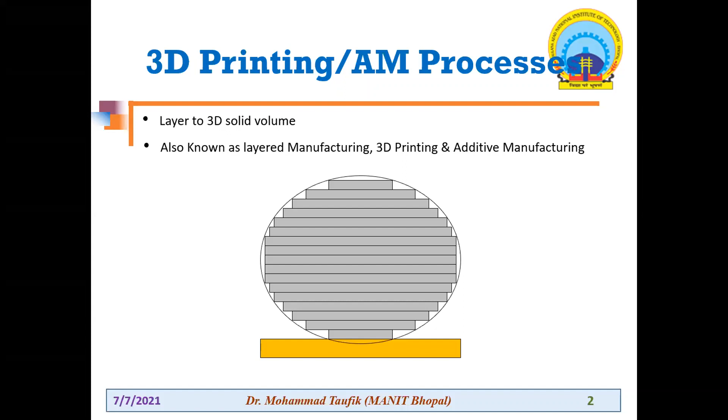Different names are used for it, however it started with the name rapid prototyping in the late 80s. From prototype development, nowadays it is creating actual parts that we are utilizing in direct part applications. That is the big advancement from additive manufacturing. We are now utilizing this process in direct part fabrication, meaning we can generate production grade parts. That's why it is known as additive manufacturing. Earlier we were utilizing it only for prototyping, not for industrial grade products that could be directly used. So it was termed layer manufacturing or 3D printing.

Now, why is this particular technique so important in the current scenario? Consider different situations, like the disaster management we face nowadays due to COVID-19. We all know this virus has affected the whole world. So people are coming up with very good ideas. Whenever we talk about 3D printing, anyone can think of something and quickly relate that idea into reality. Anyone can come up with different types of ideas.

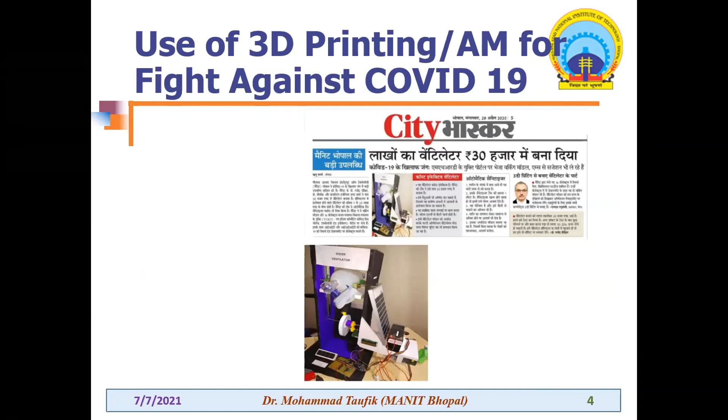Here at MANIT also, we have developed, with the help of 3D printers, some low cost ventilators. We have printed plenty of parts of this particular ventilator through 3D printing. Apart from this, I have also completed two projects here. One project is related to the development of 3D printed arm or elbow operated water tap handles. As we know, water tap handles are very prone to infection, since people use them in common washrooms, and there are more chances of infection there. So what we can do is try to minimize this spreading, and we tried to understand this through the project.

So I have added some video for you to show this.

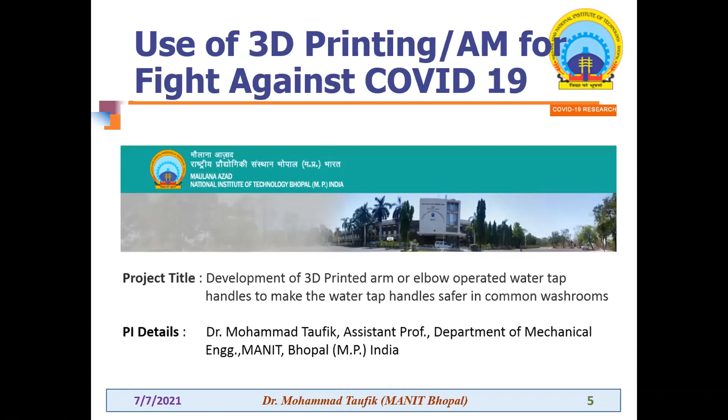This particular video is also going to cover how we are going to utilize the 3D printing process. So now, whenever we are talking about the additive manufacturing process, it starts with the CAD model. So we need to first draw a CAD model, some idea we have, and then we are going to convert it into the CAD modeling.

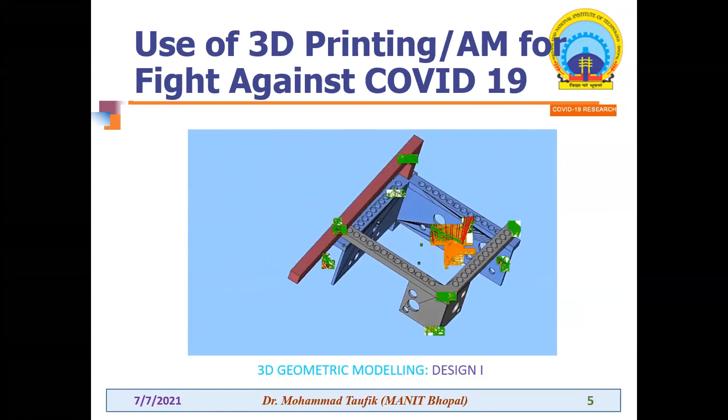So this is design one. In this project, we have developed 2 different designs that can easily set on the water tap. This is design number 2. So first of all, in the 3D printing process, it starts with the CAD model, and we need to convert this CAD model.

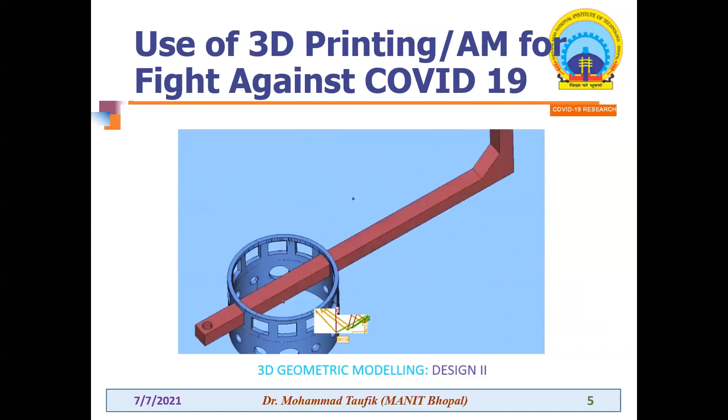And then this data we need to send after some pre-processing to the machine. So this is one of the small entry-level additive manufacturing machines, for example, 3D printers we have here. Whatever design we have, we can quickly go and print it. This is layer by layer part fabrication, and once we print it, we can see these are the 2 models.

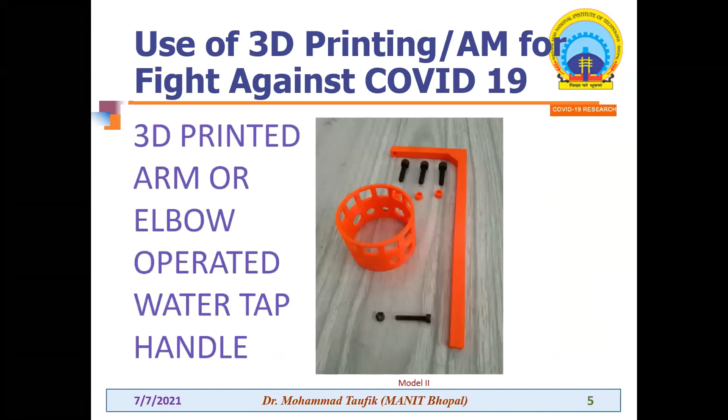Just as we have seen the CAD model, we can install this particular thing on the water tap. So instead of opening through the hand, now we can open it through the arm. We have installed it here in MANIT also. You can open with the arm instead of hand, and at the same time we can also operate this particular thing with the elbow. So we can somehow prevent direct contact.

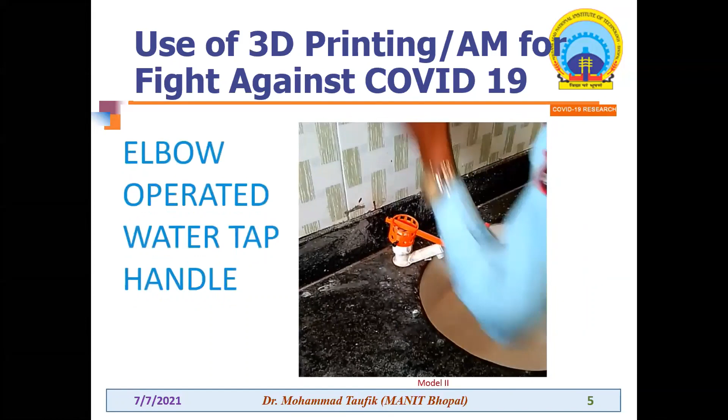So this type of innovative idea you can come up with using additive manufacturing. Whatever you are going to think, you can quickly convert into reality. This is the main benefit of this particular technology, unlike the conventional manufacturing process where we are dependent on different people. For example, if you are going for casting, we need to create the mold.

Through the pattern, we need to create some pattern. Conventionally, we have the wood pattern, and then we need to calculate the different shrinkage allowances. And then, depending on so many people, we need to buy the appropriate tools, and then we can go for this type of casting or sometimes machining process.

But here, in the room itself, it is also known as desktop printing. You can buy a printer, put it on the desktop, and quickly by yourself create any part. So an idea you can create into reality with this particular technology. This is the beauty of this particular 3D printing.

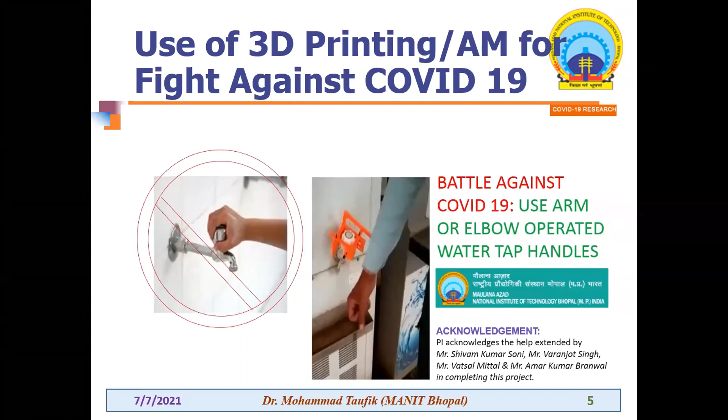That is the reason people are more and more attracted towards this particular technology. Nowadays, in Industry 4.0, we are utilizing this particular additive manufacturing or 3D printing. So you have come across this type of application also, face masks. And this is one of the very early applications of 3D printing in the COVID-19 situation, the ventilator splitter.

In the early days of COVID-19, we've gone through this particular news. So whenever we require more than 2 persons, or multiple persons, through a single ventilator, we can utilize this splitter. So different types of applications we have seen, and this is the reason why people are moving more towards this field in additive manufacturing.

So if we are going to classify this particular additive manufacturing or 3D printing, there are different classifications. Based on that, you can classify it. There are some standard classifications. Here, what I have covered is this particular classification of additive manufacturing based on the material utilized.

For example, if anyone is going to utilize the material in the form of liquid, if we have the input material in the form of liquid, we can classify that whole set of additive manufacturing or 3D printing processes as liquid based. If we have the material in the form of powder in the initial stage, we can classify it as powder based additive manufacturing process. Similarly, the same concept goes for solid based. If we have the material in the form of solid or wire, we can classify it as solid based additive manufacturing process. So this particular additive manufacturing started with stereolithography in the late 80s.

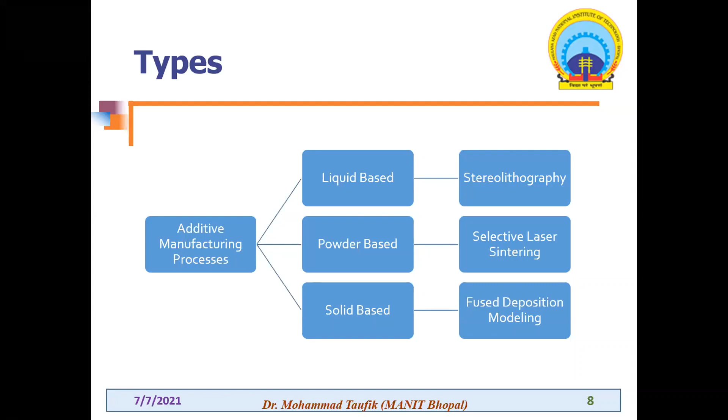Based on this, we are going to classify first, and then try to understand from the basic concept how we can utilize 3D printing or additive manufacturing processes in an optimum way, so that we can utilize it properly. It is not simple printing where you just take any file and print it. There is proper physics behind how we need to print it, which we will discuss in the coming slides.

First is the fused deposition modeling we are going to cover here. Nowadays people are also calling it by this name given by Stratasys, the company situated in America. Since that is a copyright name, people are now calling this technology fused filament fabrication due to some copyright issues.

So we will try to understand what this fused deposition modeling is through some animation. I have added some animation for you people so it will help in understanding.

So anyone please reply whether the voice is coming from this video or not. Yes sir, it's audible. Oh okay, video from video. So you can play it first. No voice is coming from the video. Voice is coming from the video or not? No sir, no. Voice is not coming from the video. Okay, so let me explain it.

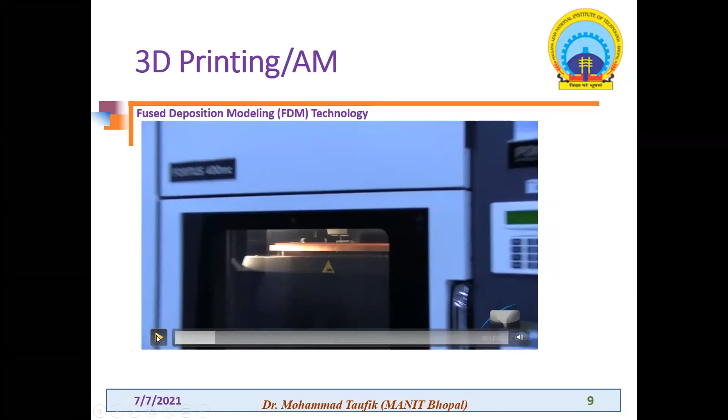So this is the FDM machine. We are utilizing it also for production grade part fabrication. There are different types of machines generated by the Stratasys company.

So here, see the close view. This is the two nozzle we have here from this particular video. You can observe through these two nozzles we are going to extrude the material, depending upon the feature of the material.

For example, if we have any overhang feature, to provide support to this particular overhang feature we need to extrude other material, that is the support material, instead of the model material. So two materials are required: one by which we are going to print it, and one by which we are going to provide support to the overhang features. After fabricating it, we can remove that particular overhang feature from the initial base model. That's why we have the two nozzles here.

See here, layer by layer, in a plane it is going to print the material. See here, in the XY plane or build platform, this is going to generate the part.

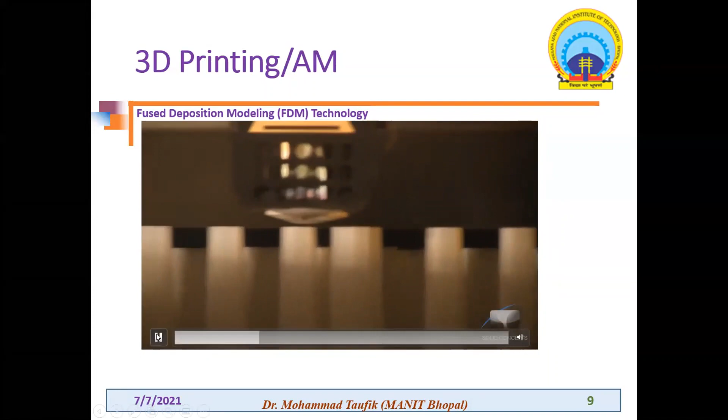Here we need to understand, once we have the CAD model, we need to slice it. Slicing means we need to provide the data in the form of planar, 2D geometry. So whatever 3-dimensional object we have, we need to slice it, and each planar geometrical data we need to pass to the machine one by one.

In each slice, we are going to generate the toolpath for each slice, and that particular thing is going to be read by the machine. Based on that, we are going to print the part. So this is the slice model of the CAD, of that particular CAD model.

We have gone through the previous video where we have seen that particular CAD model. After modeling that thing, we need to go for slicing. For slicing, we have different types of open source and paid software by which we can utilize this slicing concept. Those who are doing research in this field can write their own code through which they can slice it. So there are 3 different alternatives: open source, paid, or you can generate it by yourself.

So first of all, we need to go for the slicing. See here, whatever 3D CAD data we have, we need to slice it and convert it into the layer format.

Once we have that particular data, now we are going to transfer it into the machine. Here we have 2 spools: one is for the model material, another one is for the support material. See here, through this animation, we are trying to understand. This is the nozzle assembly, 2 wire spools with 2 nozzles.

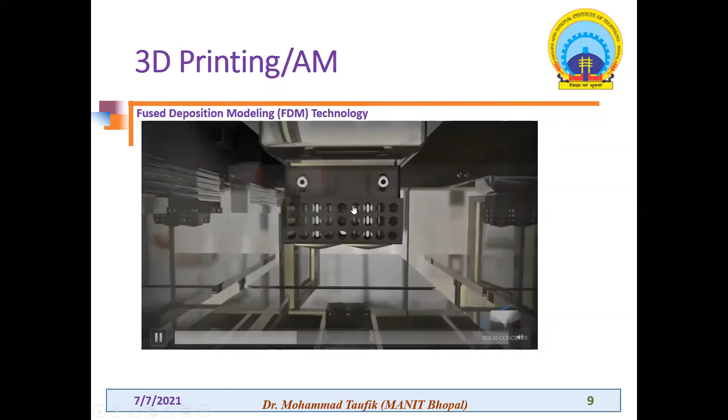See here how this material is going to pass through the nozzle, through some feeding mechanism. We need to provide some feeding mechanism through which it is going to pass to the nozzle. In between the nozzle and the wire spool, we have some sort of feeding mechanism.

And then, through this feeding mechanism, it is going to feed this wire to the nozzle. Here, see the internal view. We have the build material by which we are going to build the part, and the support material by which we provide support to overhang features, otherwise it is going to topple down. Third is the driving wheel through which it is going to pass.

And it is going to pass this particular wire to the nozzle, and in between we have the heater, liquefiers, that is going to heat that particular wire material. After heating, it is converting into semi-solid form, which is going to extrude through the nozzle.

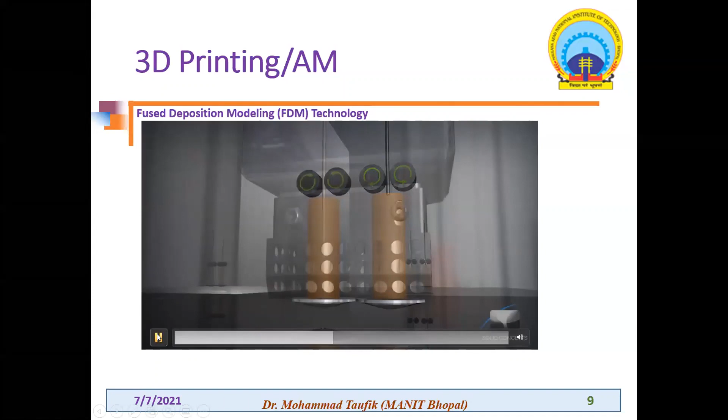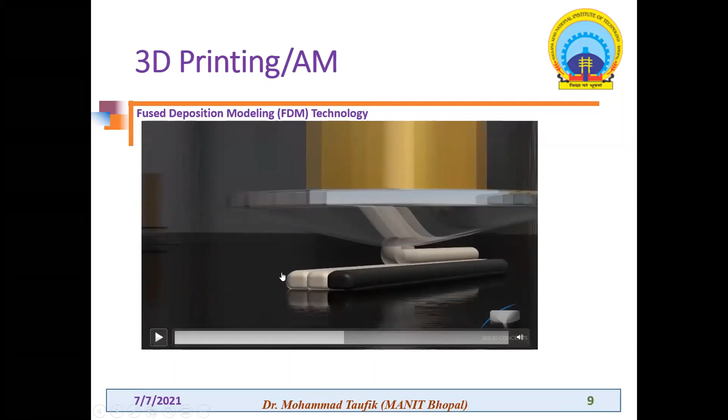Once it is going to precisely extrude that particular material from the nozzle, it is going to build the part. Let us see this animation. Assume this black one is the model material, and the white one is the support material. Based on the feature, it is going to extrude sometimes both materials, or sometimes only one. If vertical feature only, it is going to extrude only black. If we have some sort of inclined feature, both are going to be extruded. So it depends.

If you look at the whole geometry of this particular slice data, this black one represents the actual material. Here we have the extruder, extruding nozzle, and it is going to build the part layer by layer. These different color planes represent the slice data along that particular plane, and one by one, each slice data is going to pass, building the part in that manner.

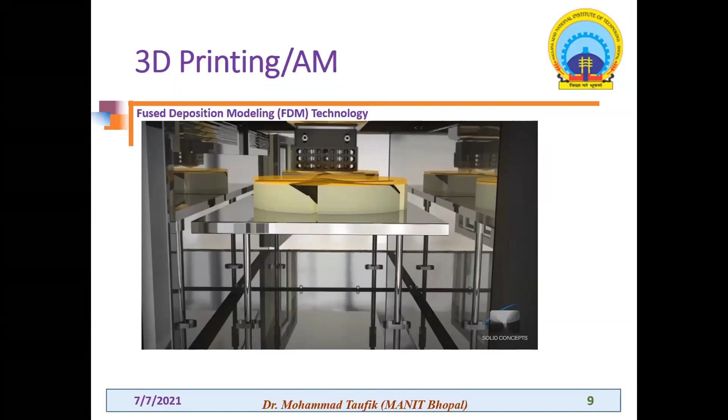Each time we extrude one whole layer, it is going to lower down this particular platform equal to the layer thickness. Once a layer is extruded, the platform lowers down an equal amount. So that particular height is always constant, and your model is going to build like this.

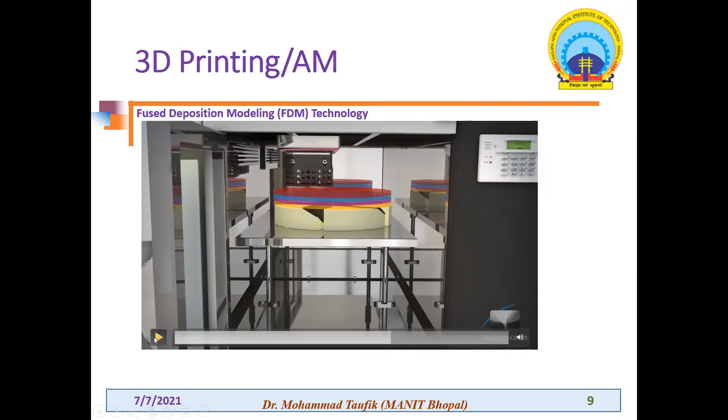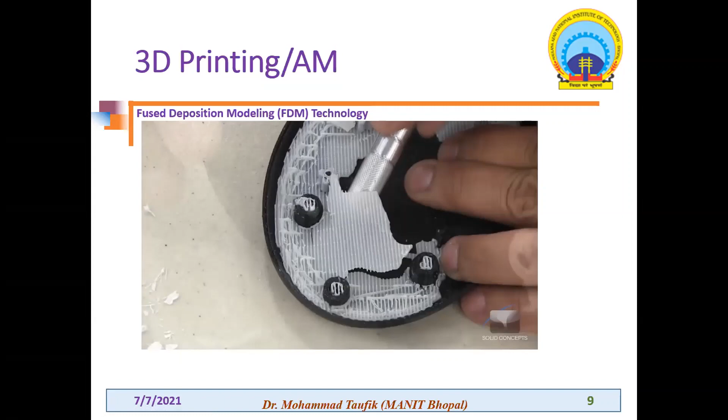Once you complete the whole process, we need to generate the finished part. You can observe here there is support material, so some post-processing is required. You need to take this particular part from the build platform and simply break away the supports to get your part. Or, if it's not possible to break it away directly, you can put the part in a soluble solution, which is going to remove that support from the actual part, and then you can take it out.

So, whatever the main thing here—these are the post-processing steps—and after this, sometimes we need to go for hand sanding, because the surface quality is very poor in the FDM process, since material is extruded through the nozzle. Due to the nozzle, whatever the minimum nozzle diameter is, it is going to affect the final part quality. So sometimes we require further finishing operations in the post-processing phase. After that, we get this type of finished part. This type of part we see on screen is not directly generated; we need to go for post-processing. After that, we are able to see this type of good surface finished part.

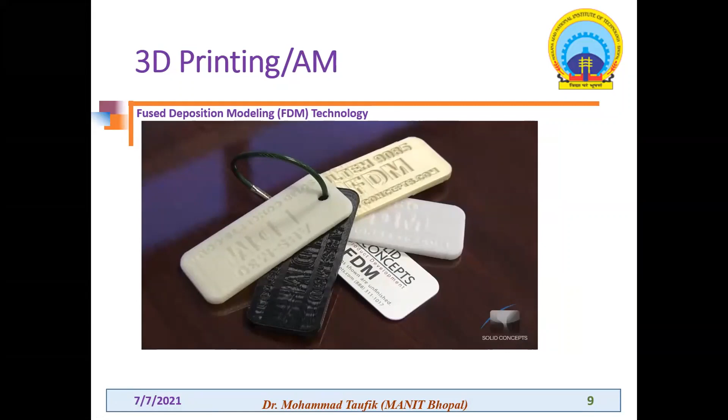So these are some samples we can see here. Another thing is that we are utilizing production grade polymeric material, so we can utilize it in different fields, from socio-cultural to industrial aspects, to create the part. This is a brief introduction to FDM. After post-processing, we are able to find this type of part. It covers different fields, from the very basic to aerospace and various industrial aspects. This is the fused deposition modeling additive manufacturing technology.

Now, the second one we are going to see is selective laser sintering.

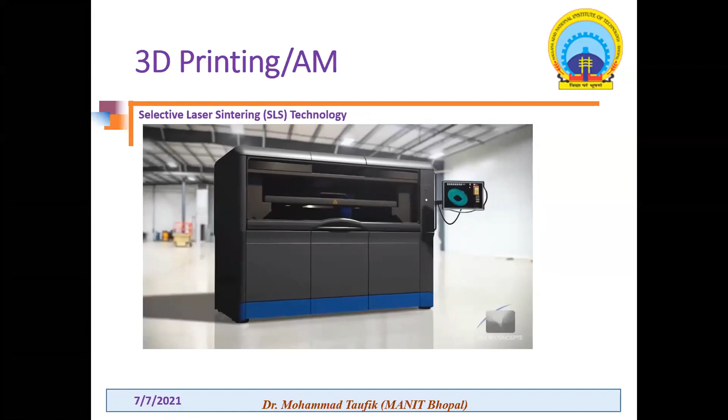Whenever we are talking about powder-based technology, we have selective laser sintering, a very famous one. Instead of utilizing material in solid form, in SLS technology we are going to utilize the material in the form of powder. You can see on this platform the material powder is already spread uniformly. We are going to utilize different types of powder particles from different materials, and quickly generate different composites. Due to this, the parts are applicable in different sectors, from metal to metal composites to plastic. You can go with this technology very easily.

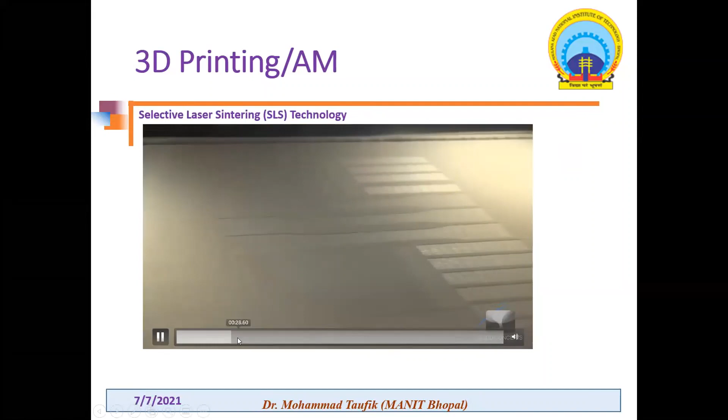So these are some parts. This particular process is also going to start with the CAD modeling.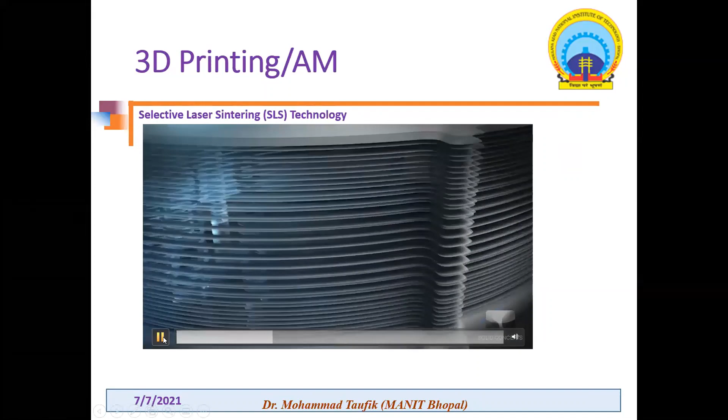Once we complete the CAD modeling, you need to slice the data for each layer. Here we have some animation showing the slice data. Each cross-sectional information we are going to store in the form of a tool path, and you need to send it to the machine. Here you can observe we have the build platform, and we have the roller through which we spread the powder particle on the build platform. Then we have the laser power source, through which we are going to sinter that powder particle.

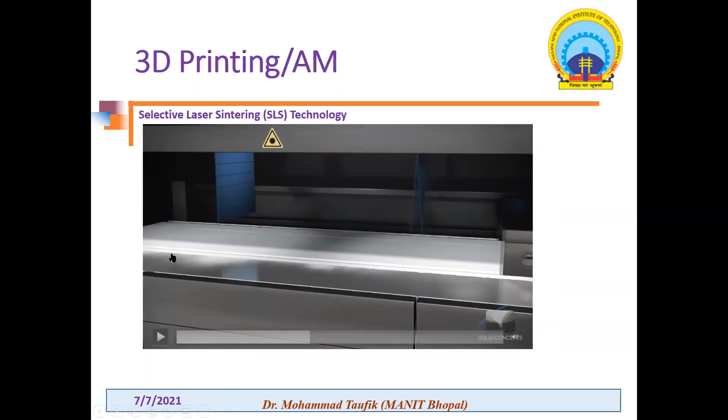In the previous process, the material extruded through a nozzle, and that semi-solid material made a neck. But here, the joining process depends upon sintering. Whatever powder particles we have, only their outer periphery is going to be sintered - it is not completely going to mix. It only sinters at the outer periphery through controlled energy passing through the laser source, a CO2 laser source. This laser scans that particular surface, and each time after scanning, material is spread again, and the laser scans that cross section again.

Once we complete one single layer or slice of information, the part build chamber is going to lower down by an amount equal to that particular layer thickness. This maintains a constant height on the platform, and builds the part in a layer-by-layer fashion. This process repeats again and again, building any three-dimensional part.

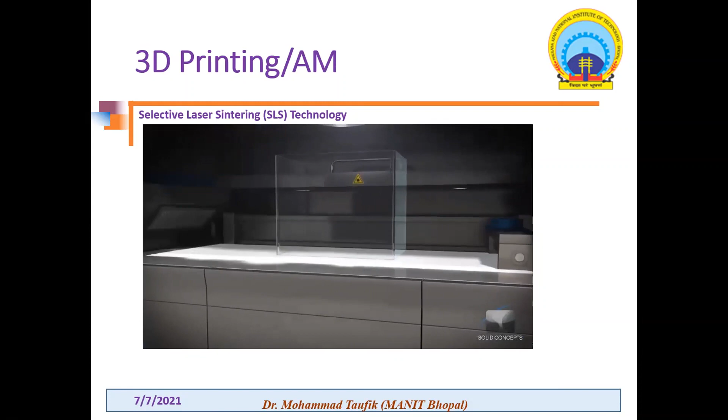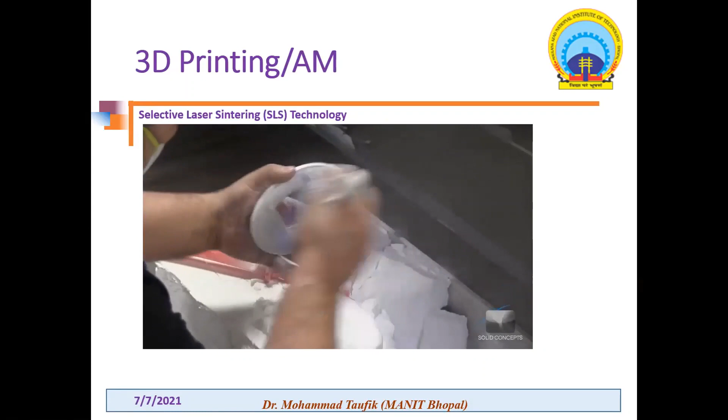Once we have completed this SLS process, we take the part out for post-processing. Again, we need different types of post-processing operations to maintain the required surface characteristics and handle other issues.

This process is utilized in different application sectors - we can see automobiles, architectures, and different application sectors where we can utilize it. So this is selective laser sintering. What we've gone through is that SLS utilizes powder particles, and it sinters through the laser source, with energy coming through that laser source.

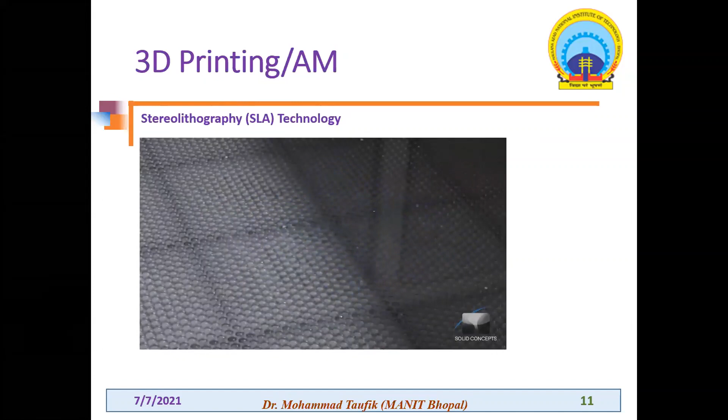Now the third one is stereolithography, also known as SLA. Here we are going to utilize photosensitive polymeric materials that cure when exposed to light. So we have the photosensitive polymeric material that cures when we provide an ultraviolet light source on it.

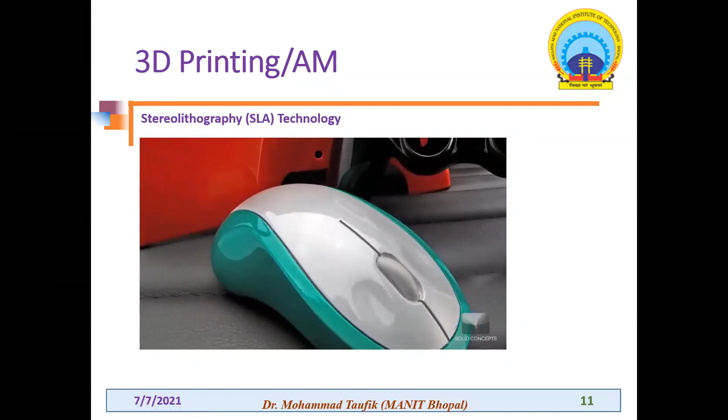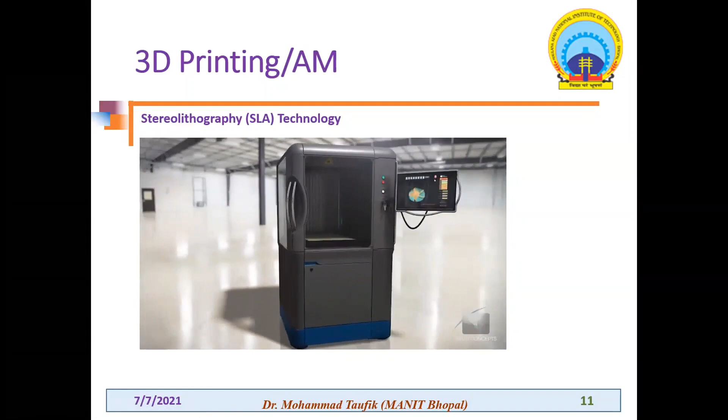Because the material is used in the form of liquid, the surface quality is very good in this SLA process. Similar to the other two processes we've covered, SLA also starts with a CAD model, and then we need to go for slicing. Here is the slice data. Once we have the slice data, we send this tool path information to the machine, and the machine begins to build the part in a similar layer-by-layer fashion.

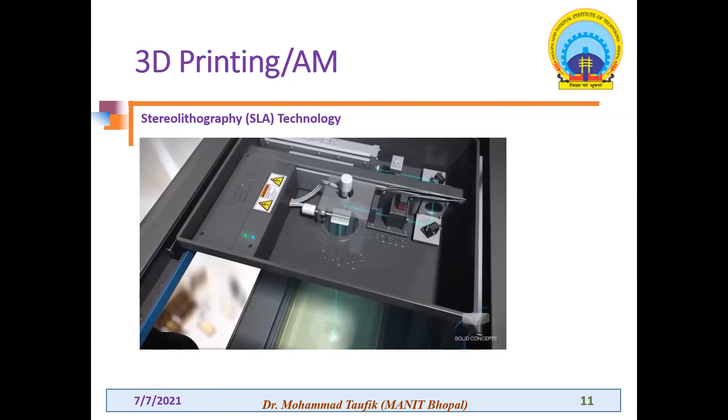Each layer is going to cure through this UV laser. This UV laser provides the UV light source, and through which the layer is going to cure.

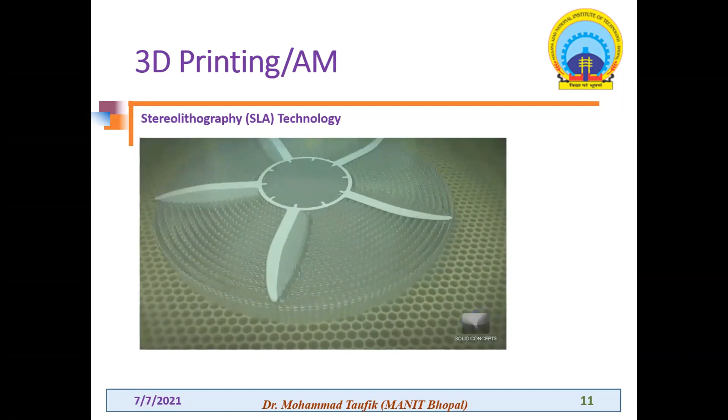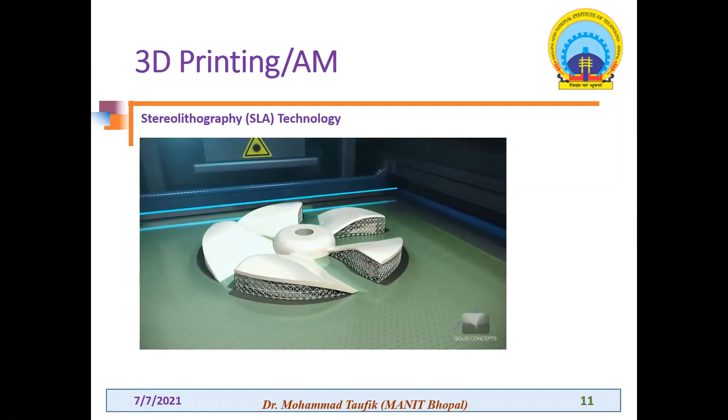Once this particular layer is completed, again we are going to spread the liquid material, and then again we are going to complete the curing process through this UV light source. We repeat this process one by one, and by doing so it completes the whole part.

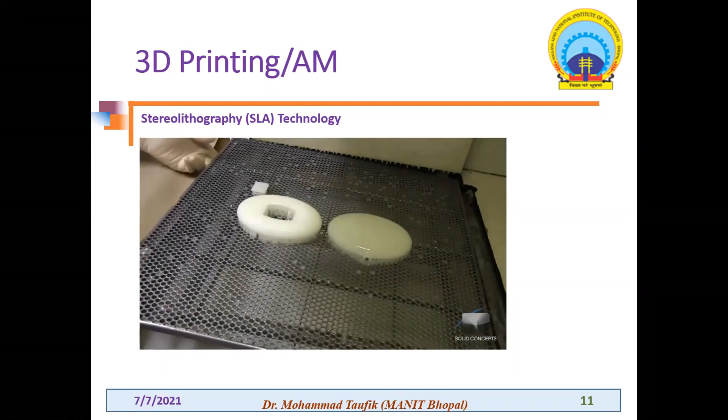Once it is completed, we need to go for post processing, and this support we are going to remove. Sometimes, due to curing, proper curing is not provided for very complex or internal features, so we need to go for a heating process so it cures more. After doing all this, we take the part, and after some post processing we utilize it.

From domestic use to industrial use, you can utilize this process. So this is a brief introduction of 3D printing or additive manufacturing processes.

Now there is something we need to remember: whenever we start this particular process, we need to generate a CAD model. So here we are going to understand what steps are required in 3D printing or additive manufacturing process, so that we understand this process in more detail. See here, these are the steps. First of all we have some sort of idea, and through that we create a CAD model.

So the first step is solid model generation from some computer-aided design software or geometrical modeling software like CATIA, Pro-E, Creo, SolidWorks, Unigraphics. And once we have the CAD model, we are going to convert this CAD model into the STL file format.

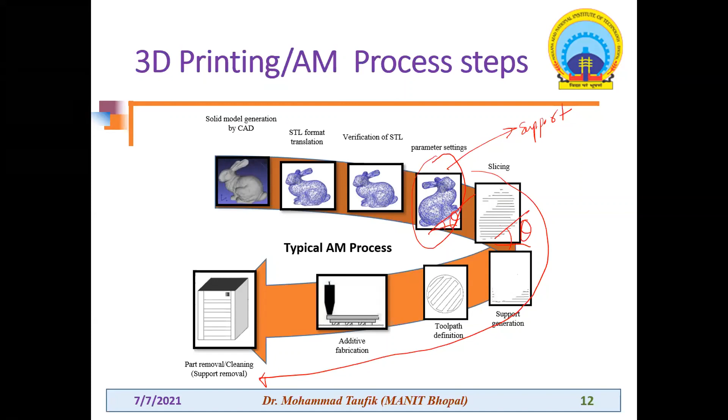So you need to think for each step. If you are going to utilize each step in a proper manner, you are going to utilize your additive manufacturing or 3D printing machine in a better way. So we need to design each and every step. Whenever we talk about additive manufacturing, we need to think about design for additive manufacturing also - how we are going to design each and every step, so we utilize the material in a more proper form and reduce the cost. There is a proper physics behind it. So we are trying to understand how we can take care of all these steps in 3D printing or additive manufacturing.

Before going further, I'm going to discuss some issues so you can easily correlate. For example, whenever we go for additive manufacturing, this is the layer by layer part fabrication technique. If we have any inclined part, it is going to slice and build the part like this, so there is always loss of information. This triangular thing shows the loss of information here. This particular way of fabricating a part in additive manufacturing, with this stair-like pattern, is known as the staircase effect. This staircase effect always occurs with inclined or curved surfaces, and we cannot completely remove this.

For vertical surfaces, we don't have this staircase effect, but vertical surfaces also have issues. For example, if this is the vertical surface, due to the filament, in additive manufacturing, in this plane we are going to get this type of information loss, or voids and gaps. So there is always some sort of constraint coming in.

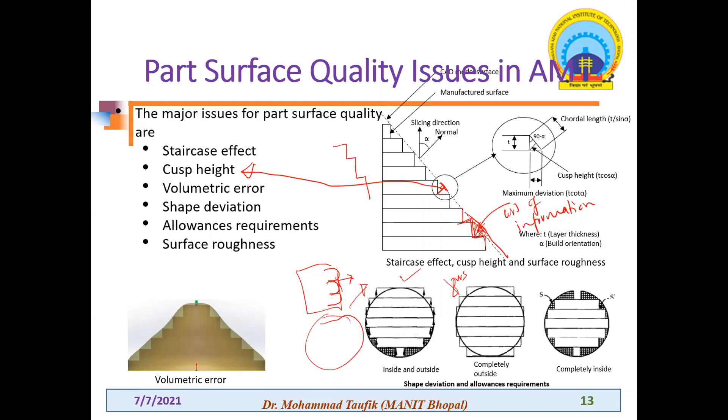So we need to think about each and every step. If we think about each and every step in a proper manner, we can control this issue up to a maximum extent. Sometimes it is not possible to completely remove or eliminate these issues, but we can control them as much as possible. So these are some constraints we need to understand, so we need to take a decision. Each process step we need to design as a decision-making process. For every problem we need to design a solution - meaning for each and every step, we need to take some decision on how to utilize that step in a proper way. We need to design in a proper way.

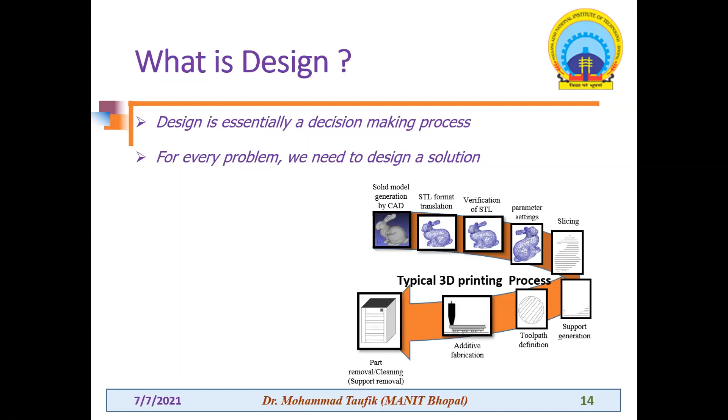So the overall thing is known as the design for additive manufacturing. Whenever we are talking about printing the part, we need to think on it also. One by one, we are going to see some examples through which we are going to understand how we are going to control these steps.

The first one is, whenever we are talking about additive manufacturing, it starts with the STL file. So how we can optimize this STL file, we need to think on it. We need to think about the STL file optimization also.

So how are we going to minimize this? If we minimize this, we are going to get a more smoother or more accurate part fabrication. We are going to move towards that.

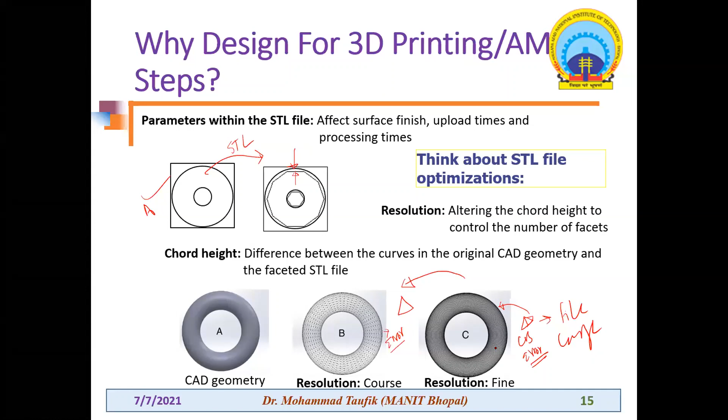Then the second one, we have different types of software for additive manufacturing, starting from free online software and open source software, like Cura which is very famous, and then paid software also, like Magics which is very powerful. If you are not utilizing the correct software, we are not going to utilize our additive manufacturing process in a proper way. There are reports in the literature that because people are not using the software correctly, they are not exploring this additive manufacturing capability in full scale.

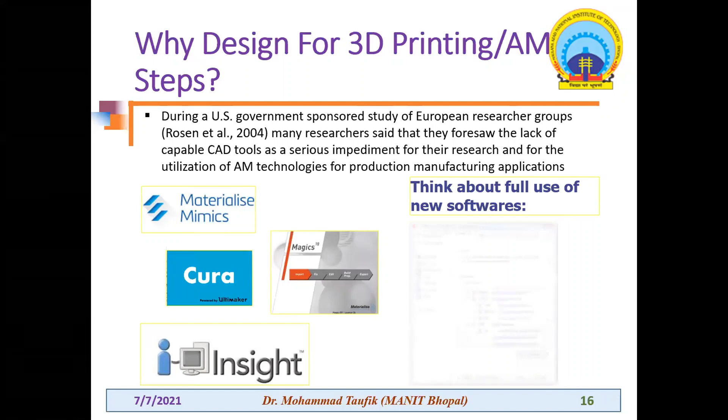So here we have different types of software. To understand the capability of the software, I have added a video recording for the Cura software. This is free software, so there is no issue of licensing here. I have added some video showing how to utilize this Cura software, which I created for this lecture.

See here, this is Cura, this type of logo is coming for the Cura software. Once you install and open it, their graphical user interface is going to look like this one, something like this. This is the graphical user interface for the Cura software. I have written here some comments, so quickly I will remove this.

Here, for example, you have imported your STL file. You have created some STL file and simply imported it. So whatever the coordinates are, based on that, it is going to place the object anywhere in the build environment in this Cura software, on this build platform. If you want to change the position, we need to translate it. Quickly here itself you can translate it. There are different options, and some geometrical modeling options are also available here.

For example, geometrical transformation we can easily do, like scaling and rotation. This is the type of translation operation we can do here. If you are going to move this particular object here and there, you're based on this option. If the geometry is going to move here and there on this platform, then after translating we have another option also.

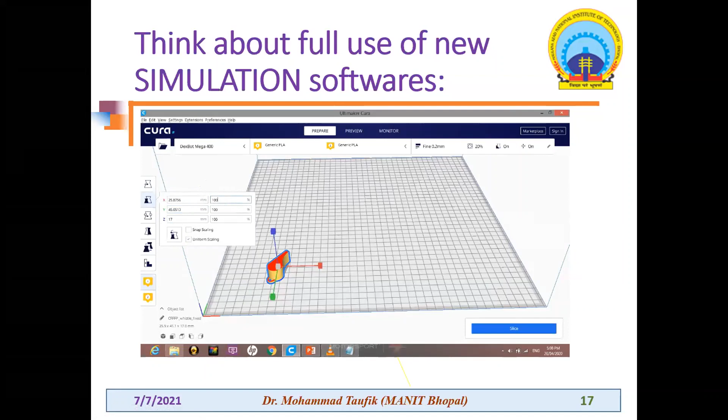Scaling, here itself you need not go to the parent software. If you feel that the size is not good, you need not go back to the geometrical software to reduce the size. Here itself you can reduce it, as you can see in this animation. By putting some value, you can uniformly scale up or down, or scale in a particular direction. These are the capabilities you need to utilize.

If you are thinking of rotating, if at a particular orientation you are going to utilize more material and that is not good, or it is taking more time, or other performance is not up to your requirement, you can easily orient the orientation. You need not go to the parent software. Here itself you are able to rotate it in any direction. So these are the different features of Cura software, an open source software.

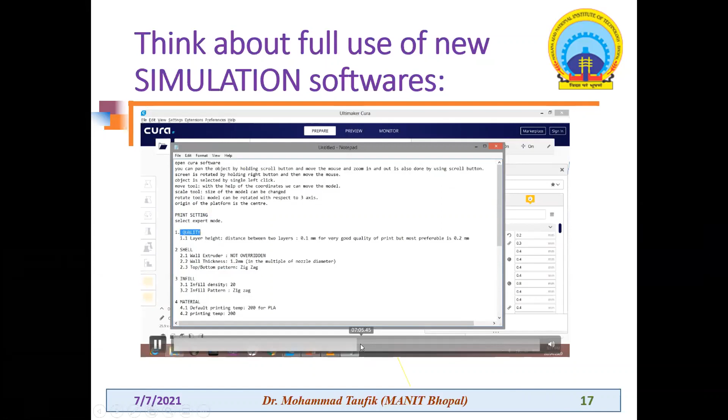Apart from this, once you have set all these things, you need to go for the parameter setting. For example, layer height - what should be the height of the layer - you need to set based on your machine capability and hardware support. You can select different options for layer height, and then set different parameters quickly.

Then you can go for the material setting, which material you are going to utilize, for example ABS or PLA, polylactic acid. Based on that you are going to change this material option, and select the different temperature - at what temperature it is going to proceed. So we have different types of options through which we are going to complete our part.

After this, once we set all these options, we can go for the slicing. See here, this window is showing slicing, which is processing. Once the slicing is complete, you can see the sliced data. Once slicing is completed, the sliced approximation data is now visible on the left side.

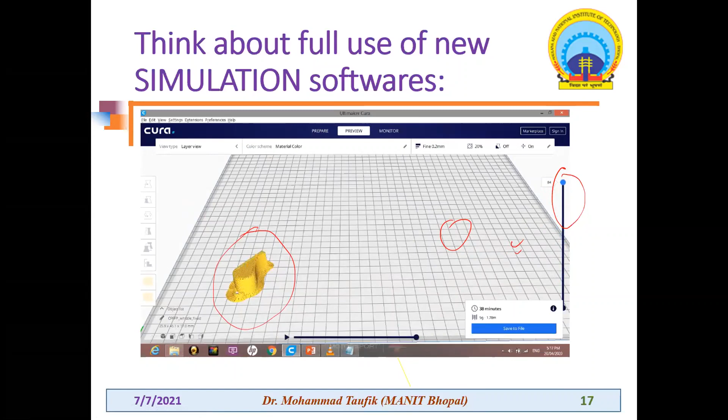On the right side we have this bar showing the number of layers. If you change the height of this bar, it changes the height of the slice data, and you can visualize each and every slice. If the support is higher at a particular slice or orientation, or some features are lost due to slicing at a particular orientation, you can change the orientation based on that. So these are the different types of options.

Once you have completed all this slicing, you need to save your data in G format. Like CNC machining, we have the G and M code. Here also we have the G and M code, but this code also utilizes extra factors like the extrusion parameter in case of FDM. So we need to generate the toolpath file in G format. See here, this is the G code, we need to save it, and then we can go for the part fabrication on the FDM machine. This example is related to FDM.

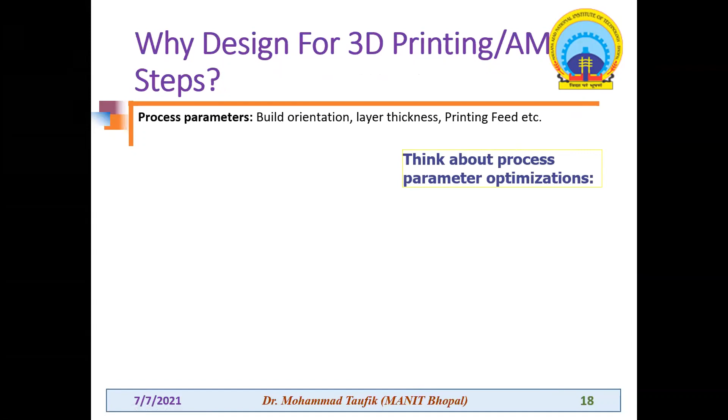The third one is process parameter optimization. We need to think about how we select different process parameters, for example the orientation of the part. If you orient this dog bone specimen in this direction, that's orientation A, and this is orientation B. We are going to fill the layer in this direction - here we have the perpendicular direction, along the length versus perpendicular to the length.

If you apply equal force in both directions, what do we think - in which condition is it going to break easily, A or B? Any participant? In which condition is it more prone to fracture?

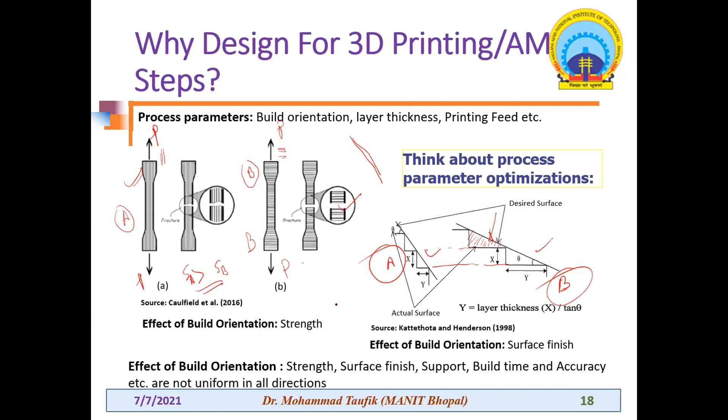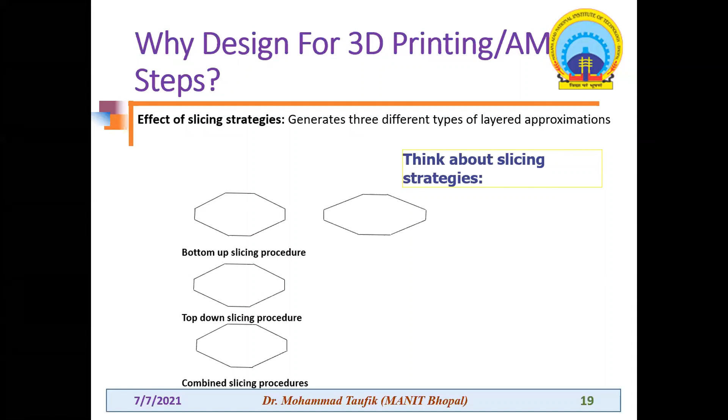So what is the meaning of this? The first one is the bottom-up slicing procedure, where we slice the object and store the data from the bottom. In the second condition, top-down, we slice the data from the top and then store the information.

If you combine this bottom-up and top-down slicing procedure, we get two different versions of the slice data. If we take half the portion from the bottom-up and half the portion from the top-down, and combine this slicing data, we obtain a completely inside-fitting part.

Otherwise, if we combine the data from this side and this side of the top-down slicing procedure, we get a completely oversized part. So in different applications you can create a part oversized and then machine it to get the desired dimensions.

Sometimes if you need to go for prototype generation or rapid tooling, you can create a mold, and based on the allowances, you can utilize the part—create a lower part geometry, make a mold through this part, and use it in the casting process as a pattern to create the part. So based on the different application requirements, you can select the different slicing procedure—bottom-up, top-down, or combined—based on the requirement. Does anyone have any doubt here?

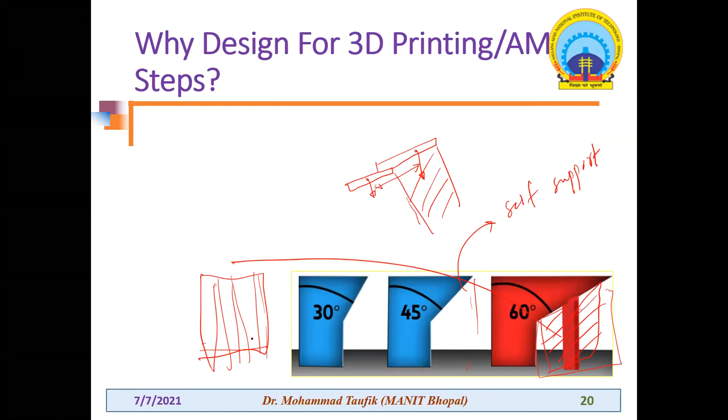So if you are going to provide support, you need to think of a different supporting strategy - either you can provide a full support, or you can change the support design so it creates a very effective geometry while saving material. This is an area of research. There are different ways to remove this support too - soluble support structures or breakaway support structures, which I have already gone through.

Next, in 3D printing or additive manufacturing technology, if you are going to buy a new 3D printer, you have options based on these additive manufacturing machines - either you can go for liquid, solid, or powder. Based on the requirement, I have taken one example: if you require a more finished part, which additive manufacturing process are we going to select? Anyone tell me - liquid based, powder based, or solid based?

If you require a smoother part, which machine are we going to purchase or select? With liquid-based material, like SLA, we always have a lesser diameter, so we always get a better quality or lower average surface roughness - RA value is always lesser here. With the nozzle-based process, it always creates more surface roughness, so RA is always higher. In between them, we have SLS. So based on your requirement, you can select a different type of machine.

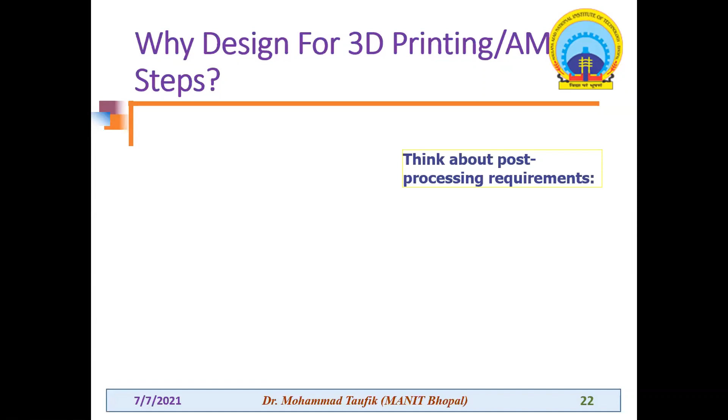There is always a chance of post processing. Different researchers have different types of arrangements for post processing to improve the quality of the part. So basically, if you are going to select quality in terms of surface finish, here we have different methods.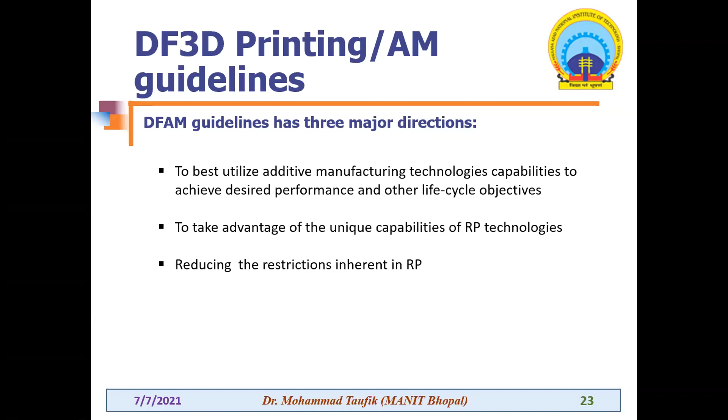So these are some guidelines related to design for additive manufacturing, or 3D printing. In brief, whenever we utilize additive manufacturing, you need to understand all its steps to take unique advantage of this technology. We cannot remove inherent restrictions in additive manufacturing, like the staircase stepping error, but we can minimize it only by clearly understanding each and every step. Once you understand this process properly, you can explore it in different application sectors.

Nowadays, due to the generation of different types of materials, people are more active towards this technology, ranging from prototyping to direct part manufacturing. We started with plastic, and now we are printing glass. In 2015, MIT printed optically transparent glass using a glass 3D printing machine. This can be used in the fashion industry and other applications like lens creation.

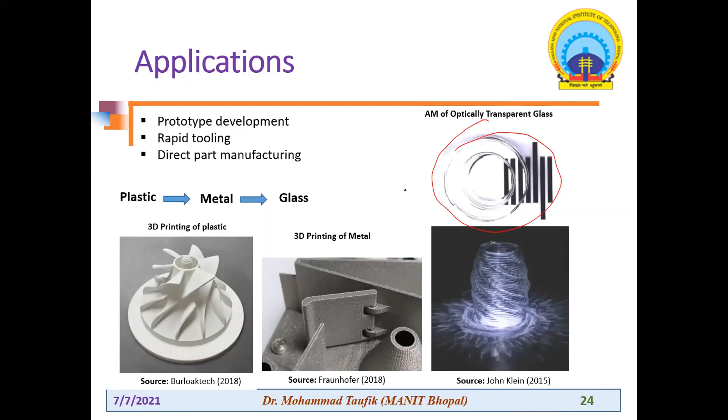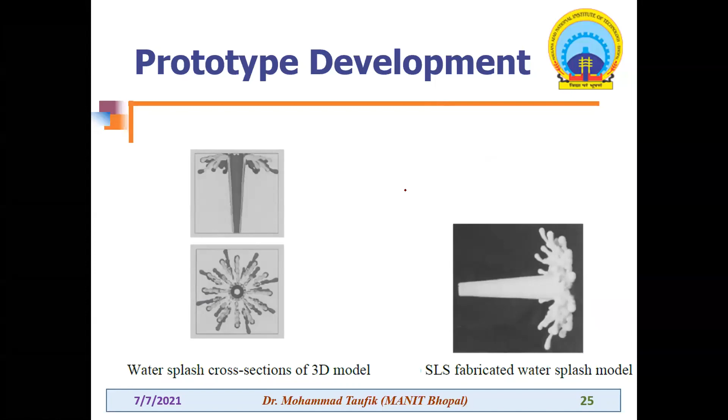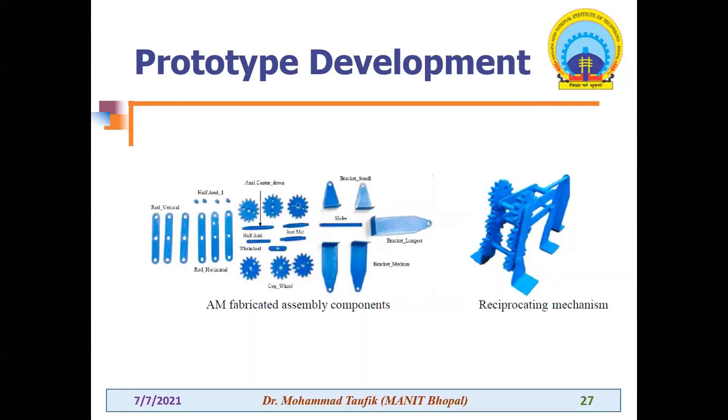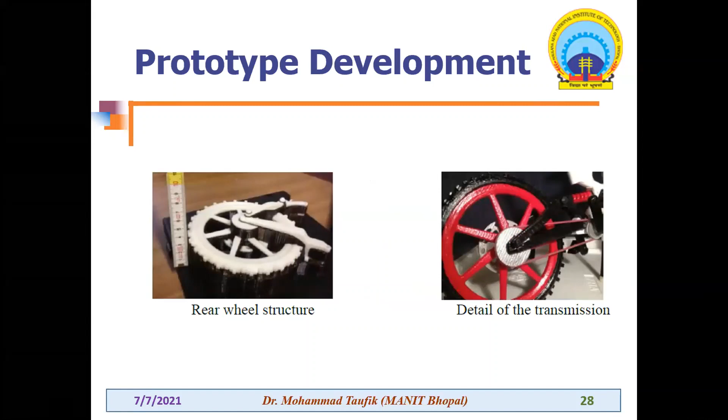Different types of applications nowadays - if you have some assembly you need to check, you can print the individual components and assemble them to understand whether your mechanism is working properly or not, as a prototype. There are different types of prototype applications - for example, some students from Italy printed a bicycle for their prototyping study.

Then rapid tooling - this is more towards production-grade application of additive manufacturing. Here we indirectly utilize this additive manufacturing process to create patterns. Conventionally we use wood for pattern creation and then create molds, but here we generate the pattern with different materials instead of using wood as a master pattern.

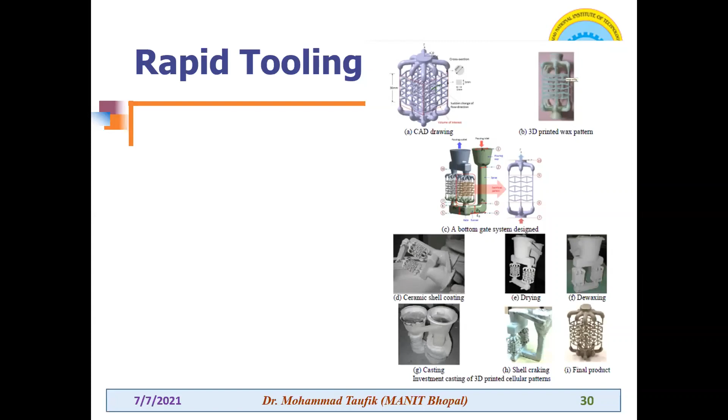And then direct part manufacturing. Whenever we are talking about direct part manufacturing, it means whatever we are printing is directly utilized as the product.

So in additive manufacturing, people are utilizing it in the medical field, for surgical guides or implants. Nowadays it is very popular in the additive medical field.

And nowadays, due to the development of different material generations like food grade material, we are also printing food, different types of cakes. We can create them with different features. You can write down your name, or you can change the ingredients.

As per your requirement, layer by layer, a different composition can be set. You can change the taste at a particular layer. So different types of innovative ideas are coming.

It is only possible if you understand the 3D or additive manufacturing process in its full capacity, so you can utilize it in a proper way. Then this application sector is going to open for you, and you can explore this technology in a more proper manner.

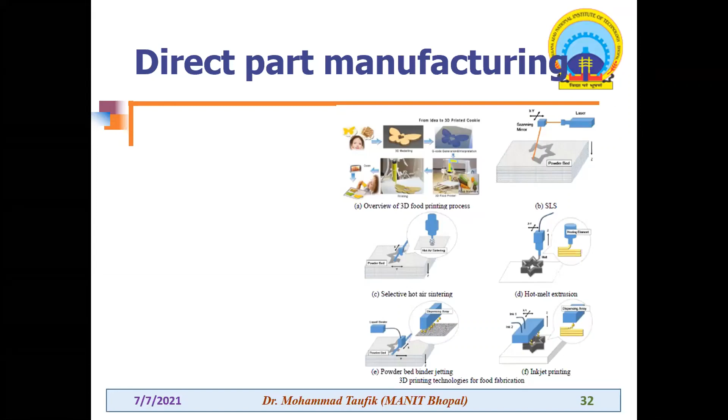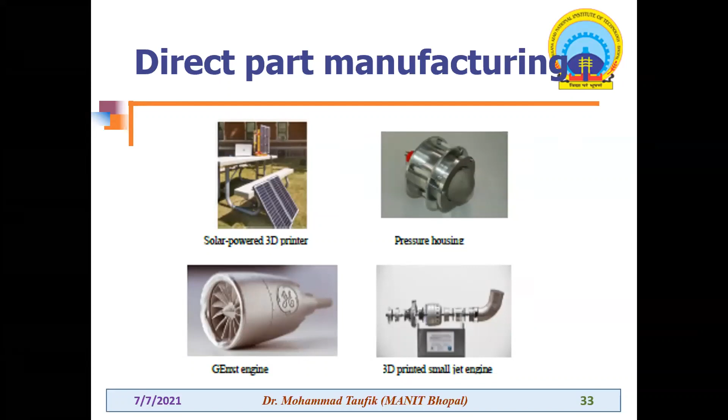Engine parts have also been printed by this. Some actuators and some lithium ion batteries have also been printed. So due to development in materials or understanding of this process, different application sectors and other interdisciplinary approaches are also evolving.

So in short, to summarize this whole additive manufacturing or 3D printing process, we need to take a proper decision at each and every step. Once you understand each and every step, you are able to explore this technology in a more proper way. And here you need to go for new software.

There is some research that I have explored with you people. Those who are interested in doing research, they can do so.

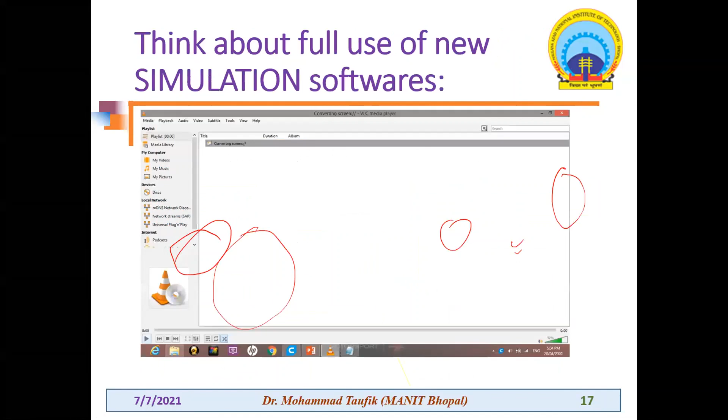So one participant, Mr. Santosh Patel, has asked: what are the major drawbacks of integrating FEM and additive manufacturing process? Actually, FEM is applied to remove the drawbacks. Please repeat the question. The question is, what are the major drawbacks of integration of FEM and additive manufacturing processes? Whenever we are going to integrate something, we always have the possibility to explore what we have not explored before.

So it's always going to give something more fruitful. It's not that it limits the application. Whenever you are integrating something, if we have weakness in one process and strength in another, we utilize the weakness and strength of each process to improve the whole process.

Sir, can you mute me for 1 minute? Yes, yes, you can take it.

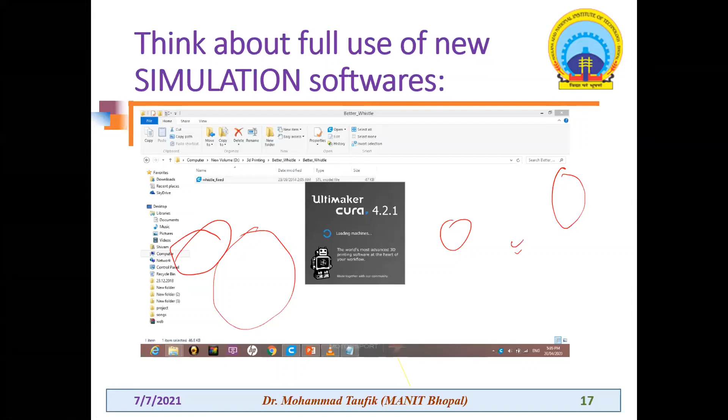Sir, I am asking about the slicing you have shown, the top and bottom combined approach. How can we apply it in actual manufacturing? Yes, you need to understand this is some sort of different type of slicing procedure.

Based on your requirement, for example, if you are going to utilize the product where the geometrical requirement is very high, we cannot go for deviation. So what we can do is create an oversized part and then remove the extra features. So one thing is how we are going to utilize these features and get the combined slicing process.

Usually we have the bottom-up, top-down slicing procedure in most software. This is a matter of research. Those interested in doing research need to develop the program by themselves, then they can utilize it. Those interested can go through my papers; I have developed these slicing procedures in an ASME conference paper.

It was around 2016 when I went for this ASME conference. Those who are interested can go through my profile and download this paper, where I have discussed each and every step of how to implement it. Okay sir, thank you sir.